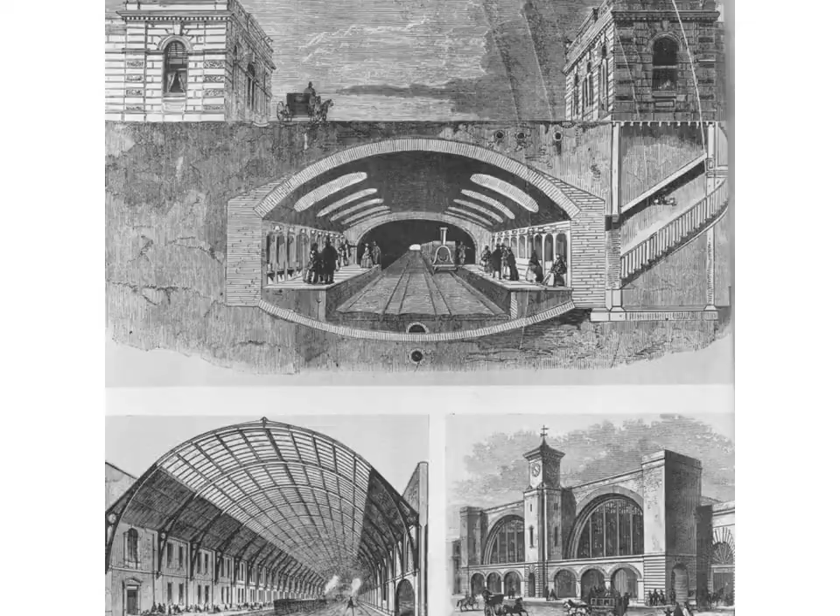In 1848, Semper was involved in protests against the perceived backwardness of German socio-political arrangements. The protests failed and Semper was arrested and exiled. After living in Paris for a while, he came to London, where he remained until 1855. In those days, Britain was the epicentre of a process called industrialisation, which was giving rise to new forms of architecture and urbanism. At the time Semper arrived, London must have been an exciting place to be, but also strange, alarming, and sometimes even shocking.

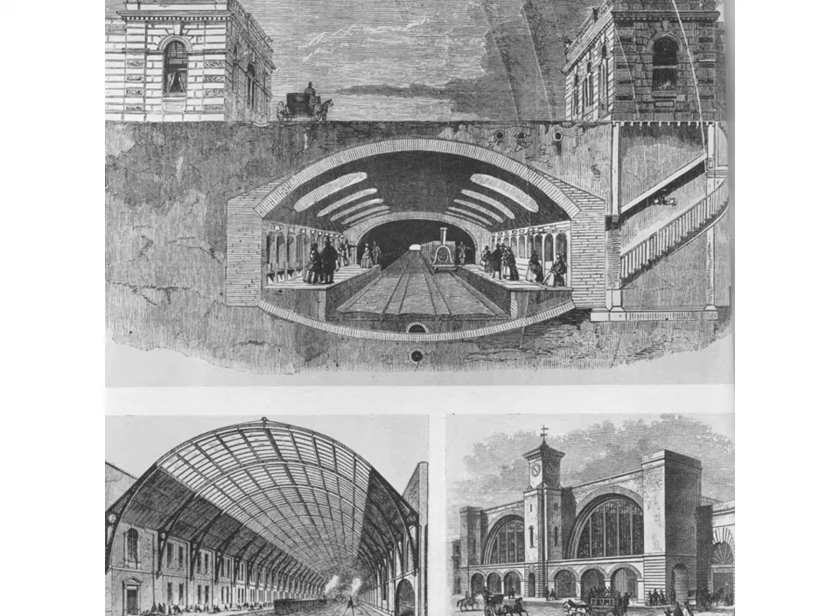While exiled in London, Semper worked on a book he was writing called Style in the Technical and Tectonic Arts, or Practical Aesthetics. As he worked on his book, inevitably his thinking was informed by his experiences of London. Semper needed to give his practical aesthetics some foundational ideas, but he wanted to avoid the classical principles that haunted architectural theory in those days. Semper decided to base his practical aesthetics on 4 common methods of building, which he called the elements of architecture. They are tectonics, or carpentry, stereotomics, or masonry, textiles, or weaving, pottery, or ceramics.

In Semper's theory, the elements come before architecture. They are born out of the day-to-day necessities of living in a primitive agrarian society. In other words, a society based on farming. They are the basis of activities like making clothes, domestic furnishings, pens and fences for keeping animals, temporary structures for ritual events, and dwellings for shelter.

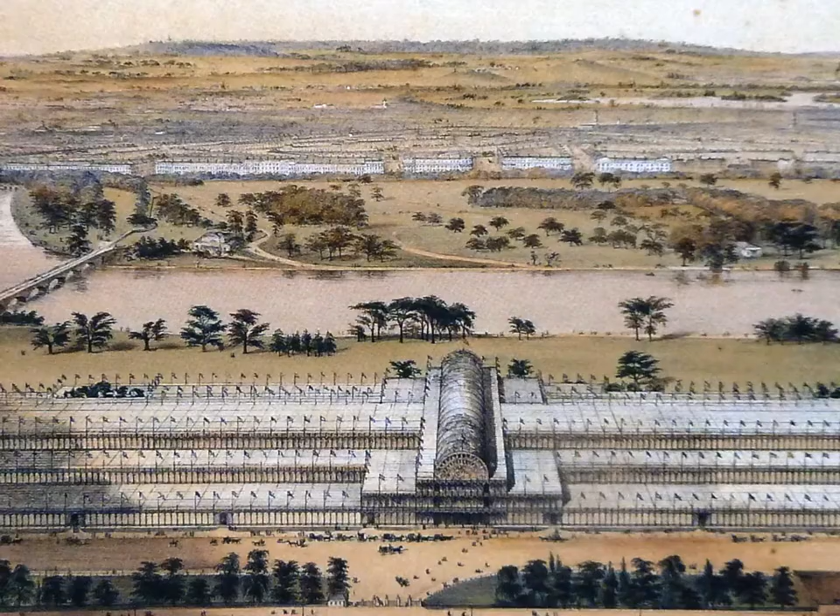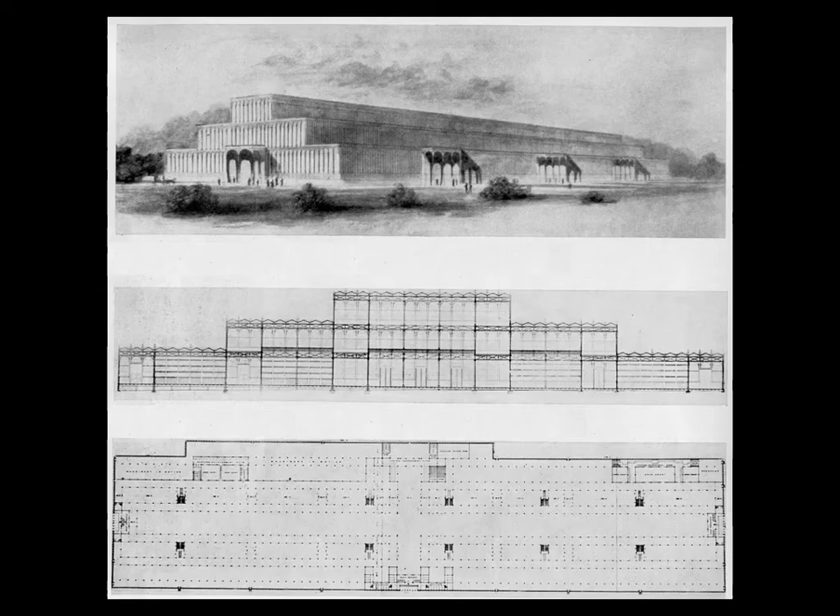Today, it's hard to imagine the excitement of the first international exhibition for industry and art, which opened in Hyde Park on the 1st of May, 1851. The exhibition was housed in a new kind of building made from metal and glass. It was called the Crystal Palace. At the time, people claimed the large metal and glass building gave them entirely new kinds of feelings and sensations. Here is how one architect visitor to the Crystal Palace described it.

We are in an artificially created environment that has already ceased to be a space. We are separated from nature, but yet we are scarcely conscious of it. The barrier that separates us from the landscape is barely perceptible. We find ourselves, so to speak, in a piece of sculpted atmosphere. The sun's rays come to us not through individual openings. They fill the space with a completely beautiful naturalness, and as the sun of this space does not give or allow the light to be anything special or particular, so we must also be content with the fact that the colours borrow their limits from the objects outside. In this way, it is like a magical, poetic form of light.

Now for us, living in the early 21st century, enormous metal and glass buildings are nothing out of the ordinary. In fact, we have rather come to disapprove of them. We tend to associate those materials with the climate crisis and all its associated problems.

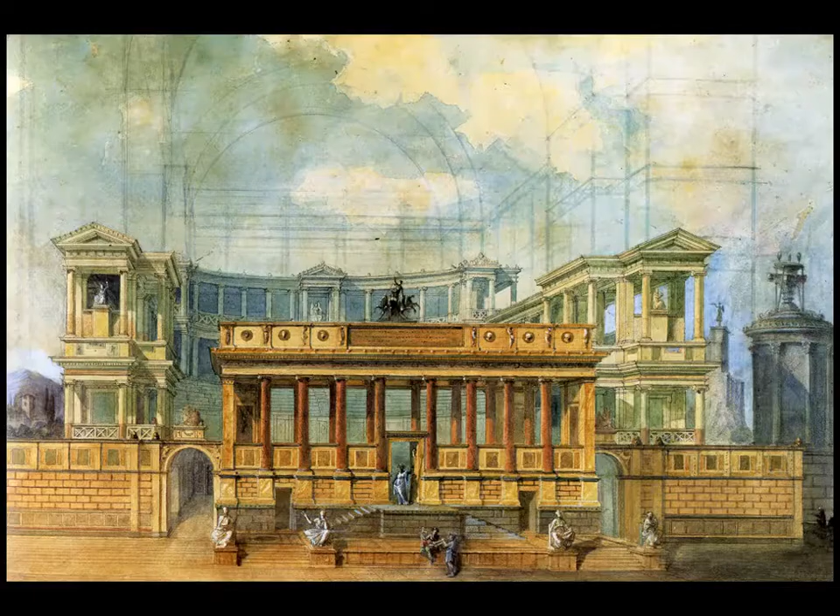Semper was involved in the design of a number of the exhibitions inside the palace. He even designed a theatre, shown in this drawing, which unfortunately was never built. Notice how Semper drew the actual metal and glass building as a framework of lines fading into the sky.

But Semper wasn't very interested in metal and glass and sculpted atmosphere. What fascinated him were the exhibits inside. It is said that he visited them every day, familiarising himself with the various items placed on display.

One item Semper found especially interesting was a one-to-one model of a Caribbean hut from Trinidad, which to him seemed to embody the four elements in a remarkable way. Because the idea of the four elements had come to Semper before he saw the Caribbean hut, when he did see it, he immediately read it as empirical evidence that justified his theory.

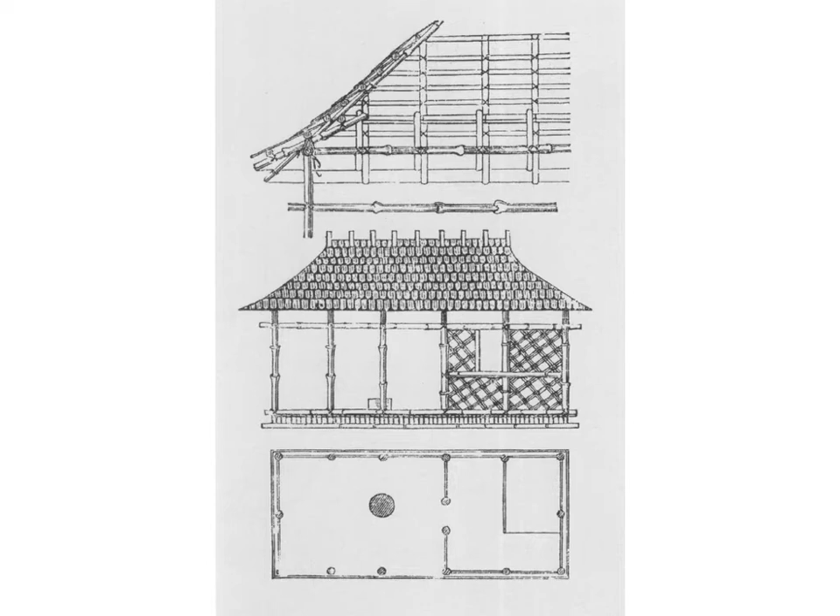Semper's practical aesthetics includes a drawing and written description of the Caribbean hut, and I am now going to use those to demonstrate the four elements to you. To begin with, tectonics. In Semper's system, any framework of posts, beams and rafters is a tectonic element. The framework of the hut was made from bamboo. I've coloured it dark blue in this drawing.

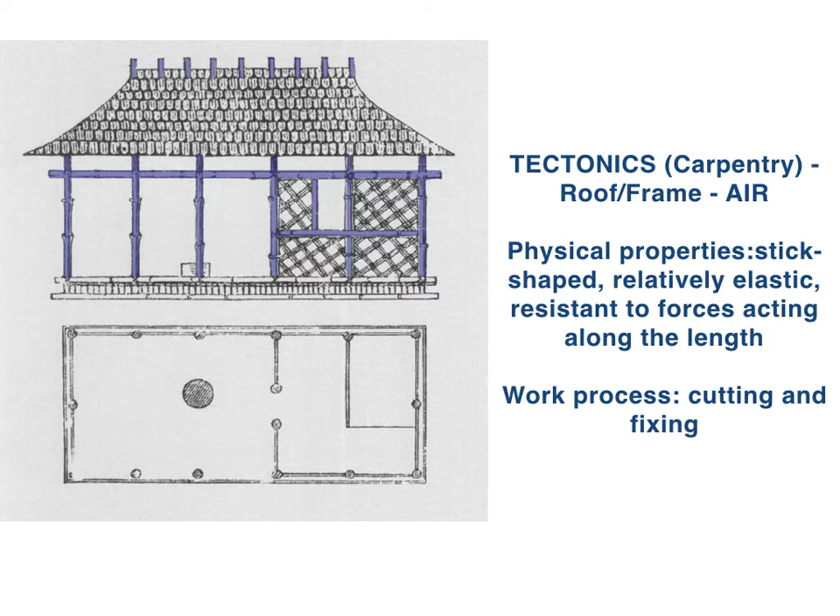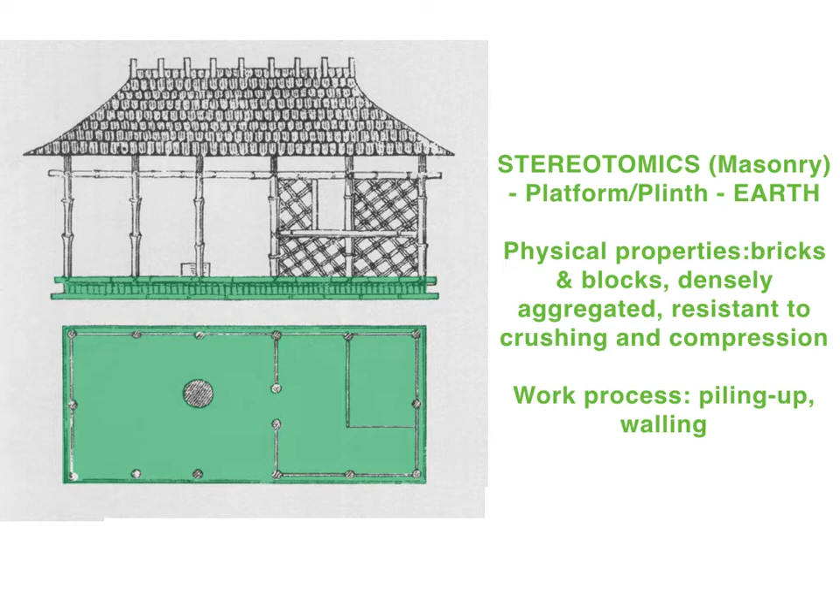Now let's look at the stereotomic element. In Semper's system, any platform, plinth or podium is a stereotomic element. You can see that the hut sits on a raised platform. I have coloured it green. And if you look closely, you can even see the markings of a course of brickwork or maybe stone.

The textile element keeps out the rain and the sun, but, perhaps more importantly, it separates the building into an inside and an outside.

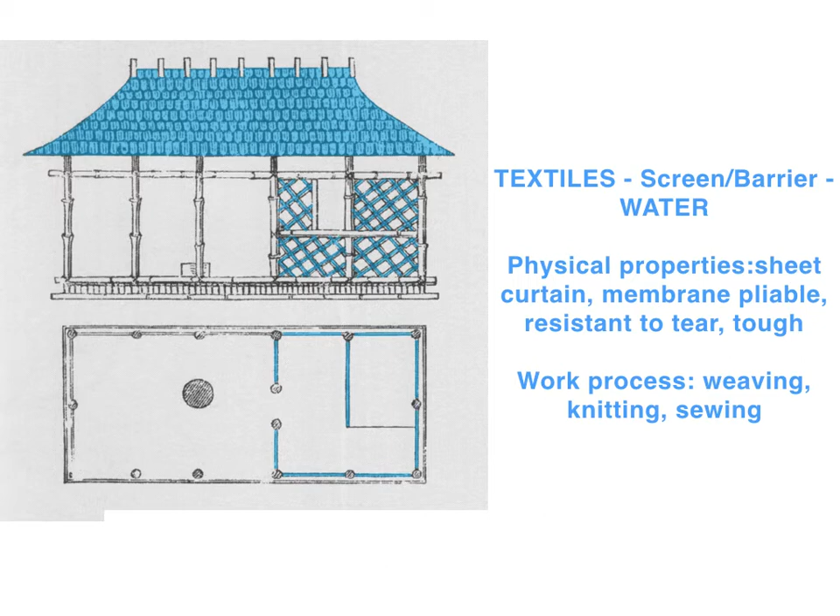Finally, we come to the pottery element. In Semper's system, any hearth or fireplace is a pottery element. On this drawing, I have coloured the hearth orange. It is represented by a round figure on the plan diagram and a raised bump on the elevation.

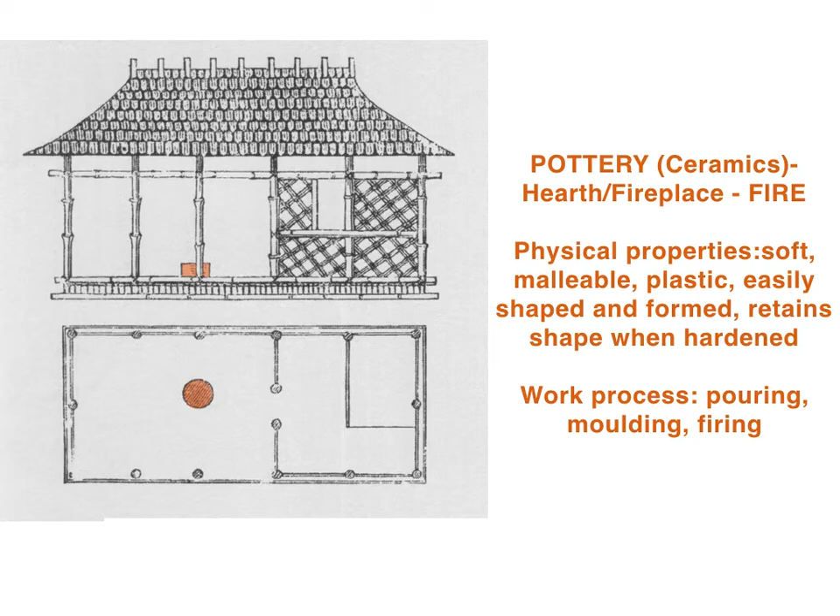One thing that often puzzles people about Semper is that it is very hard to find the elements in the buildings he designed. The reason they are hard to find is because, as I mentioned earlier, Semper thought of the elements as preconditions for architecture. He did not regard the elements themselves as sufficient for architectural creation.

To see how the elements actually can be used in modern architectural design, we have to leave Semper behind and move into the 20th century. One architect whose work demonstrates elemental thinking in a very convincing way is Ludwig Mies van der Rohe.

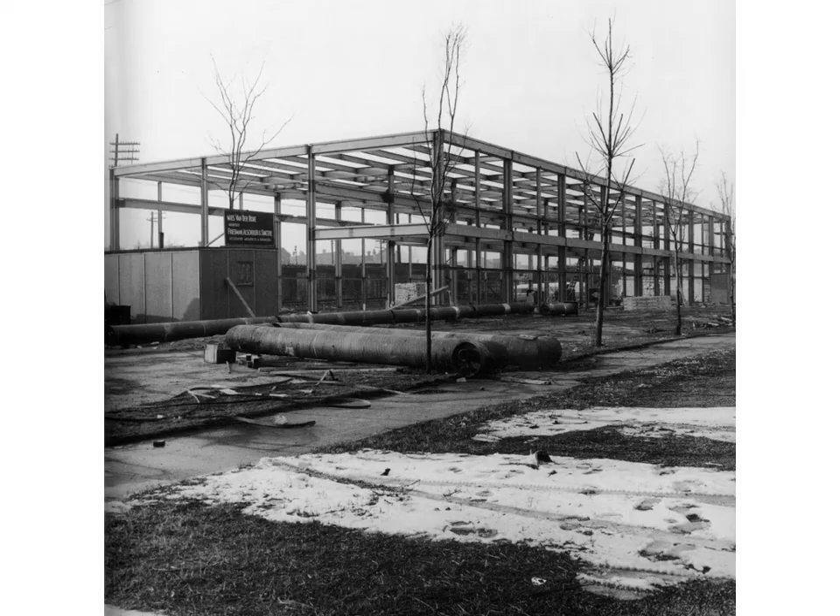Mies, like many other architects of his generation, quite self-consciously tried to design elemental buildings. The reason he did so is because he believed architecture was under threat from modern technological progress. Mies wanted to save architecture from the destructiveness of progress. Please note, the word that is often used to refer to this kind of anti-progressive attitude is avant-garde.

Mies asked two challenging questions. First, he asked, is it possible to reduce architecture down to just the four elements only? And second, he asked, is it possible to use industrial technology as a means of carrying architecture beyond destructive progress and into the future?

Now, we could look at any of Mies's buildings and find the four elements, but the one I'm going to use is called the Farnsworth House. The Farnsworth House sits in a meadow beside a river some 60 miles west of the city of Chicago. It was designed and built between 1945 and 1950. In other words, right in the middle of the 20th century, just after the end of World War II.

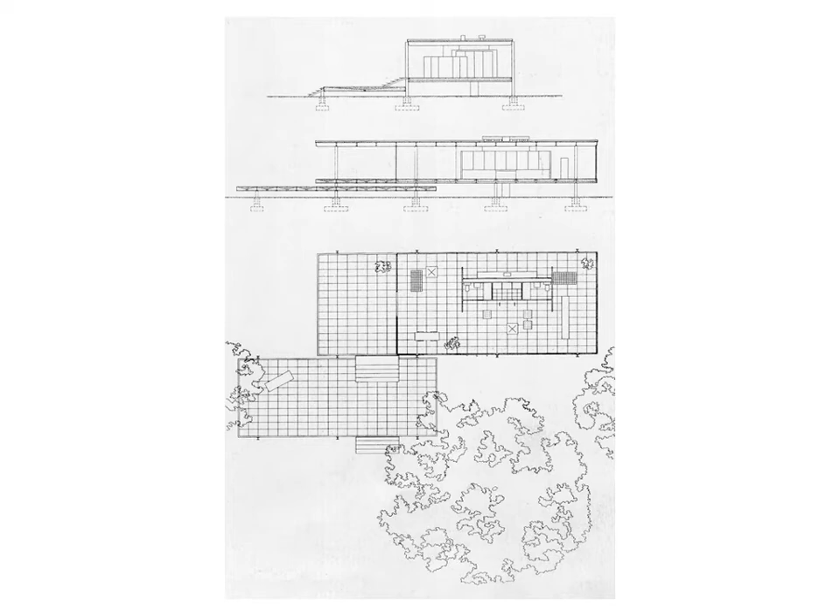At that time, the consumer society that is responsible for climate change in our day was only just beginning to emerge. I should mention, Mies himself was German, but he had immigrated to America just before the war to escape from the National Socialist regime in Germany. The Farnsworth House was intended as a weekend retreat, not a full-blown residence.

I hope you can see from this image a marked similarity between the Caribbean hut and the Farnsworth House in the way both buildings are dominated by the tectonic element, in other words, by the building frame. As we've seen, the frame of the hut was made from bamboo. With the Farnsworth House, it is made from an industrial product, namely rolled steel sections.

In Semper's system, the tectonic element is characterised as a process of joining stick-shaped elastic components resistant to forces working along the length. You can see from this photograph how the Farnsworth frame bears those characteristics. The tectonic process will produce three-dimensional lattice structures that are open and relatively lightweight, which is why tectonics is linked to the terrestrial element air.

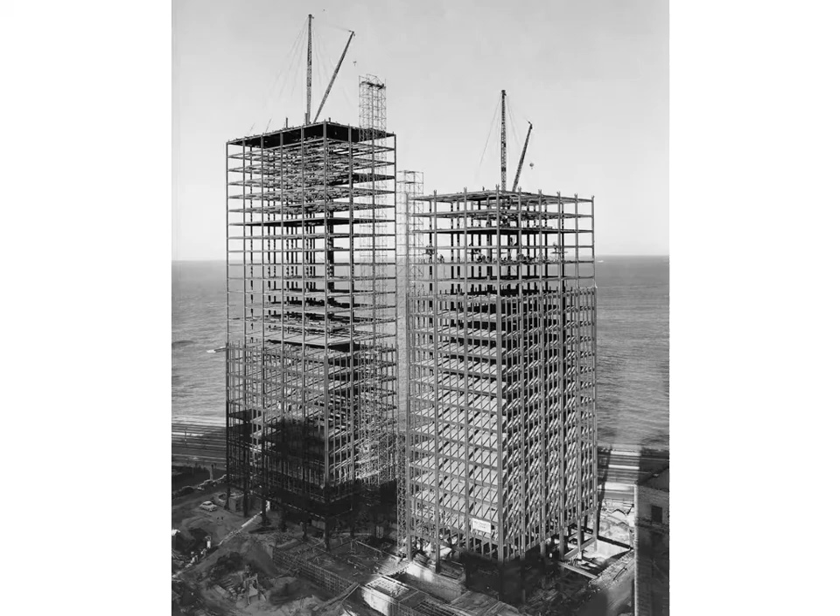Returning to the Farnsworth House. The second similarity between the Farnsworth House and the Caribbean hut is that both buildings are raised up and off the ground and sit on a kind of platform or plinth. In Semper's system, platforms and plinths are associated with a work process called stereotomics, or masonry. I've tried to illustrate masonry in the slide shown here. Masonry involves working with strong, densely aggregated materials that resist crushing and compression. The most common material used in masonry is stone. The mason will work the material into regular, systematic pieces that can be piled up on top of one another.

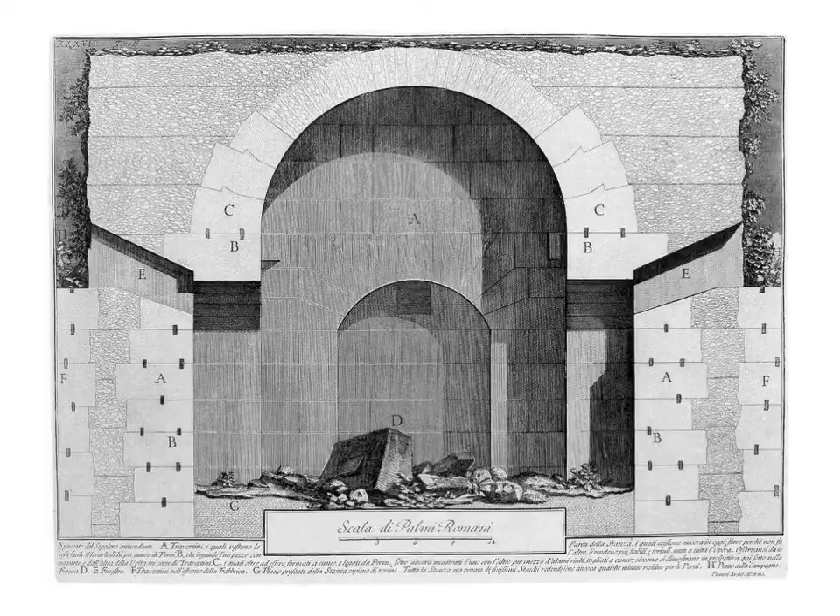With the Caribbean hut, the platform was obviously a masonry element, built either of bricks or blocks. But at the Farnsworth House, there is no masonry work to be seen, and yet there is a platform, and it does seem to have the same relation to the totality of the house as the masonry platform had to the totality of the hut. Notice that the Farnsworth platform is suspended within the steel framework and how the space below is left open.

Now, it's not unusual for a platform to have open spaces below. Essentially, that is what a basement is. What is unusual is for the basement to be visible from the outside. Now, in the case of the Farnsworth House, there's a good reason for opening up the basement to the outside, because the meadow in which the house sits often floods, and when that happens, the open basement means the floodwaters can pass through. Moving up and onto the top of the platform, notice how the surface is paved with stone slabs. These are a more obvious reference to masonry.

Turning now to the textile element. Both the hut and the house use processes of weaving to fabricate screens and barriers that fill in between the members of the frame. In the case of the hut, the screens were made of tiles for the roof and a wicker work of some kind for the walls. In the case of the house, the screens are woven out of steel and glass. To see more clearly what I mean, it is useful to return to the twin apartments at Lake Shore Drive. As you've already seen, the frame is enclosed by a curtain wall of steel and glass, woven between the voids of the lattice.

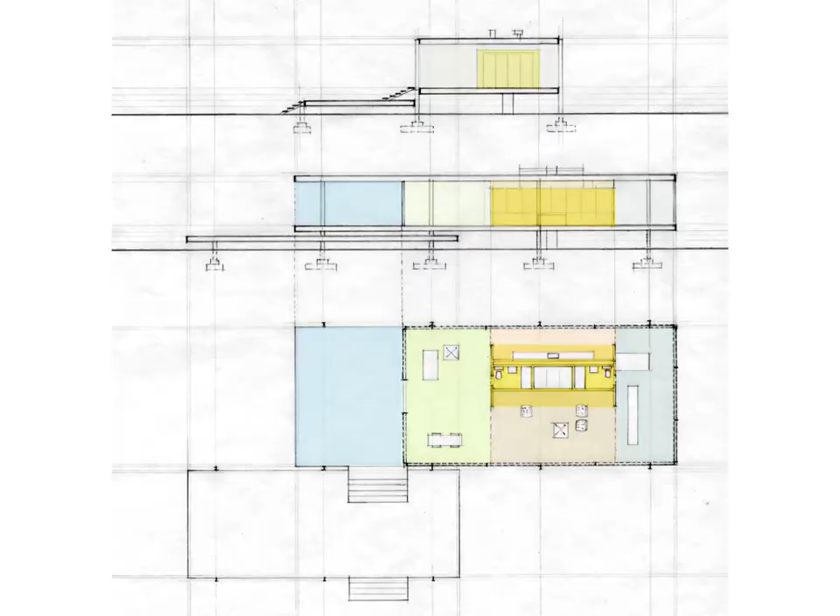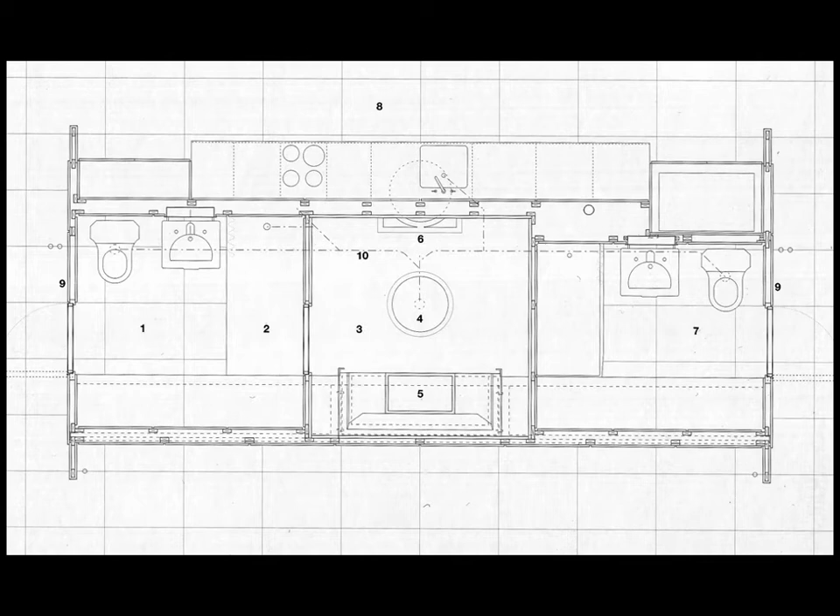If we look at this plan, we can see inside the Farnsworth house and we begin to realise how complicated it is. And, moving in closer, we begin to realise it's full of pottery. Recollect, in Semper's system, the hearth is made from materials that are soft, malleable, easy to shape, and able to retain their shape when hardened. That is what he meant by pottery or ceramics. For example, the metal flue that carries away smoke from the fire and the electricity and water conduits are made from ductile materials, from metal or plastic. The bathroom features and fittings, the sink, the bath, the shower, are made from porcelain or plastic, all of them shaped to suit their functions.

For Semper, what was especially important about the hearth was the way it served as a place for formalising social relationships. He wrote about it as the locus of exchange and communication. He wrote, "Around the hearth the first groups assembled, around it the first alliances formed, around it the first religious concepts were put into the customs of the cult. Throughout all phases of society, the hearth formed that sacred focus around which the whole took order and shape."

Semper's speculations about the importance of the hearth draw our attention to a significant difference between the Caribbean hut and the Farnsworth house. With the hut, the hearth was a housing for the fire only. It was just a fireplace. It was located in the porch, the threshold between the inside and the outside of the building. At the Farnsworth house, the fireplace is just one specialised item amidst a whole range of pottery items installed inside the hearth. Compared to the hut, the Farnsworth hearth has expanded to become a small building nested inside the house, like a sanctuary inside a temple.

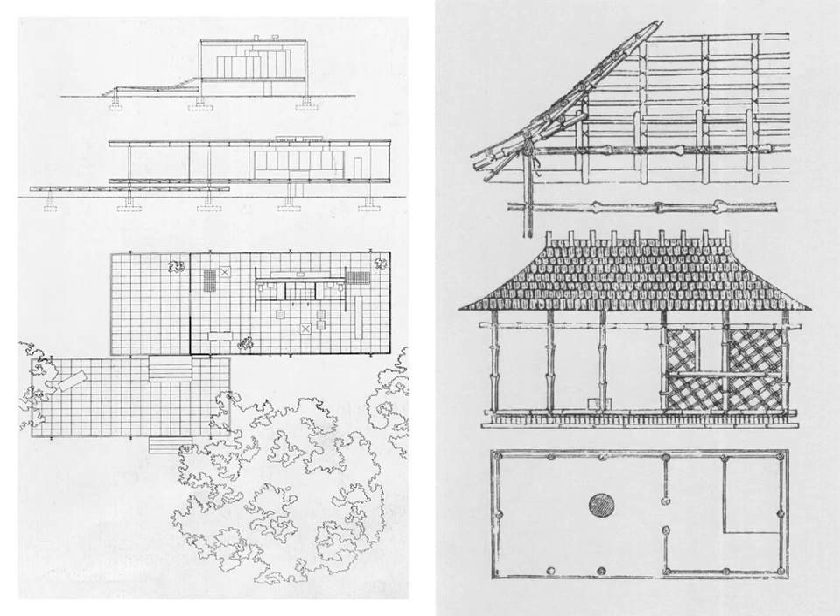Now, I want to draw your attention to something very important. Please notice how this small building inside a building is not only a space dividing element or a housing for the fireplace and bathrooms, it is also the entry point for an array of materials that are brought directly up and into the house from pipes, wires and conduits that run underground through the meadow outside. These include electricity and water, but also information technologies such as telephone, television, and today the internet. All these facilities are brought to the house by means of specialised distributive systems that work not at the scale of the building, but at the scale of the entire urban territory. The word that's often used to refer to distributed systems such as these is network.

With the design of the Farnsworth house, Mies used elemental thinking to show how the first element, which in Semperian terms marks the locus of sociability, was about to be radically altered by life in a networked society. We, all of us, are living with the consequences of that radical alteration. We were born into a networked consumer society. If, as architects, we want to think elementally today, then we have to begin with Mies, just as he did with Semper. But we cannot use the same questions that Mies asked. It's up to us to formulate our own critical agenda for today.